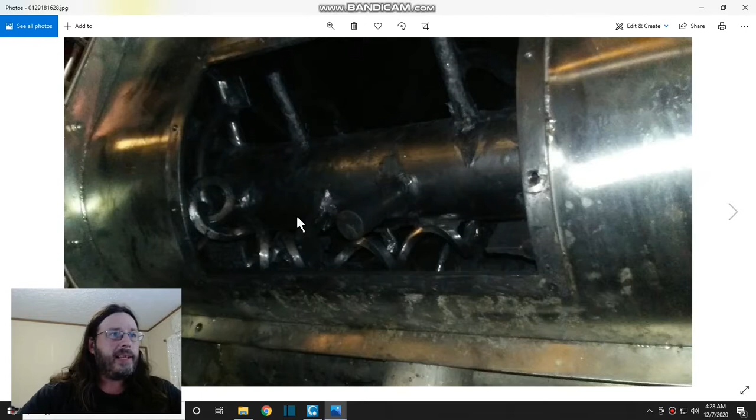This was one of them pigtail screws. I think I've got pictures of the after of this, of what came out. This was on one of them big feeders that I had to build the stands for. This screw would get jammed up and overamp the motor, and of course pop the reset. So they would hit the reset and try to run it again, and it would just keep flexing the screw, flexing the screw.

Inside of this feeder, you had these mixing arms, the counter rotating mixing arms to break stuff up, and eventually it flexed it up enough that it got tied up into this. They were on two separate motors aside from the screw motors, so of course they kept turning, and eventually this thing jammed it up, overamped, and shut the thing down.

At that point they take the side off from it and say, oh hell, we got a mess in here. So they called me up and wanted me to cut all this out, and I was like, okay, I guess. What do you want me to cut it out with? It's all stainless, I can't just take a torch in here to cut this stuff out. I can, but it's just going to melt stuff and make a mess. So I think I ended up cutting most of this out with a freaking grinder.

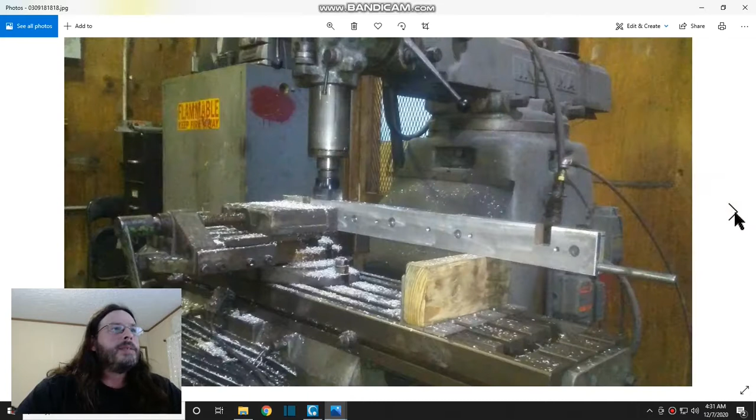What's this? This is some mill work I was doing. I had an old Induma mill, I think that thing was, and it was about slap wore out, man. The bed was all worn on it and everything, but it worked.

It was better than what I had before, which was nothing. I actually got this mill and set it in here, but I think I was doing some face milling on this. This is a heater, another heater bar heater. It's got a tube that runs down it, heating element runs down it, and I think we had them fabricated or got them from another company, and they were too wide.

That's what it was - they were too wide here, and I ended up taking, I think, about a 1/4 inch or something off from them.

This was a pretty handy little thing that I made. Actually, I think I made it for this job. It was just like a little support stand. I didn't have any little cool machinist jacks or anything like that, so a block of 2x4 bolted to a piece of angle iron. If it had to be shimmed up a little bit, I would take actual wooden shims, like you'd use in framing a door, is how I would shim stuff up.

Oh yeah, there's my thing from the beginning. All right,

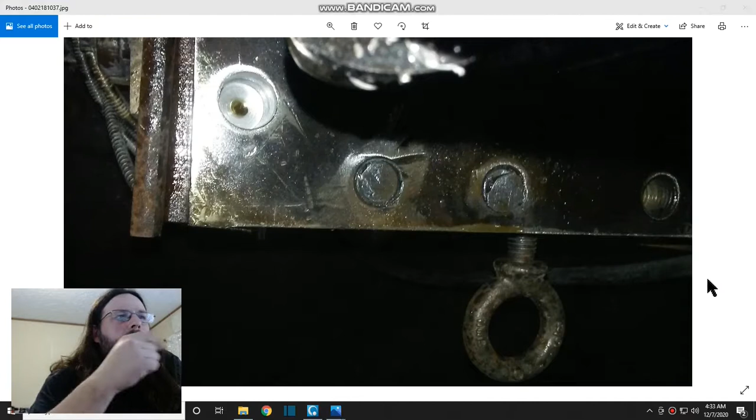This was bolt extraction in a barrel section, I think, for one of our big twin screw lines. They break these bolts off when they put them back together. So they brought me the whole barrel section, a giant solid steel block with two holes in it for the screw to run through.

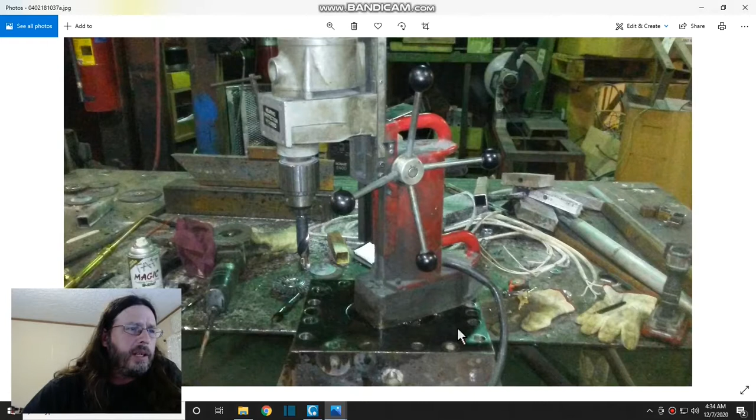There's a whole series of pictures here. It was way too big to put in the mill or anything like that, so I used this Milwaukee mag drill and magged it down. I think I put a couple pieces of angle coming off the table to set it on and clamped it down to that angle, then magged it down and drilled the hole.

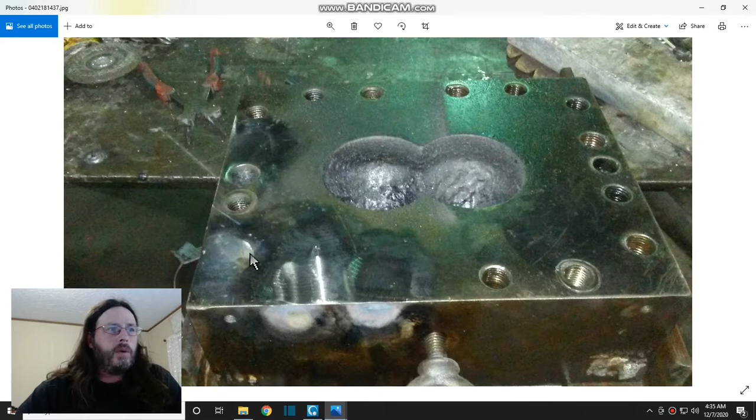I had to weld up the holes because the threads were just gone, and there was no chance of putting inserts or anything in these things. We tried it - you'd put an insert in, it'd last maybe a week, and they'd rip the threads out of the inserts. So I just welded them up, ground them down, and re-drilled and re-tapped the hole.

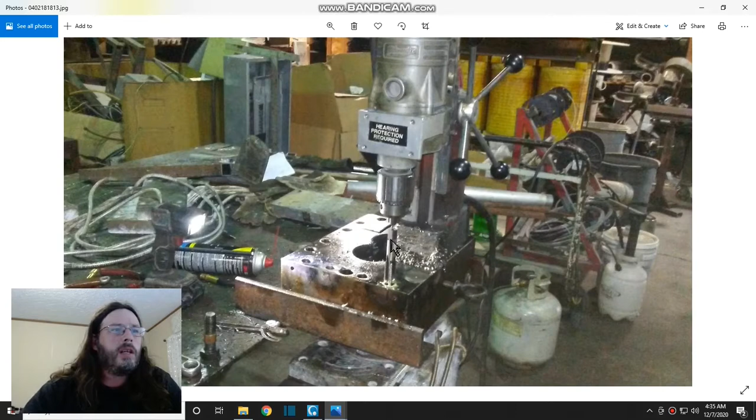That is a self-powered drill press operation there. I had to keep constant pressure on it, so a pipe wrench stuck in a piece of pipe gave just about the right tension and pressure. And there's using a center to line up your tap - that's an old machinist trick.

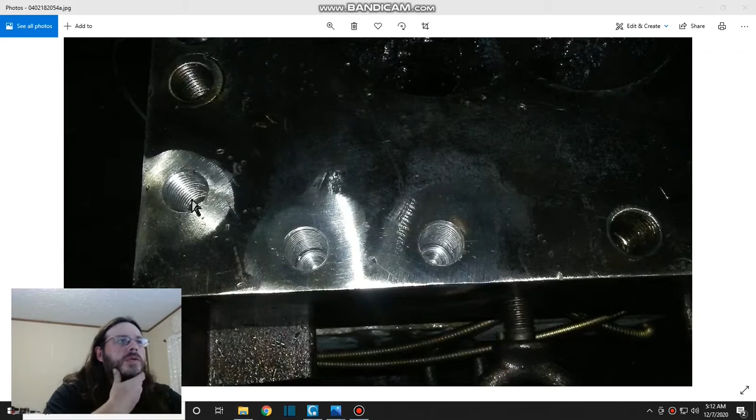And there are the holes all tapped up and finished. I can't remember exactly how many I'd done on this, or the size - I think they were like 20 millimeter, a little bigger than 3/4. I remember that.

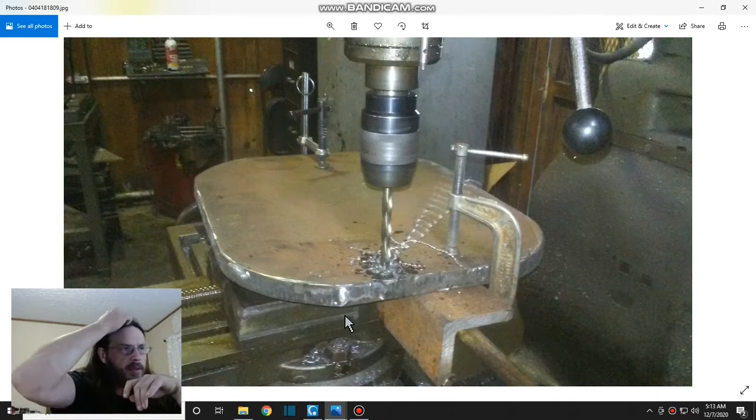Let's see, there's some kind of plate that I was drilling out. I think I didn't want to take the vise off the mill for some reason - I had another job set up or something. So I just clamped in a piece of angle iron and clamped the plate to that, and it worked. It kept me from having to take the vise off. There was no real load, so I wasn't worried about it spinning out.

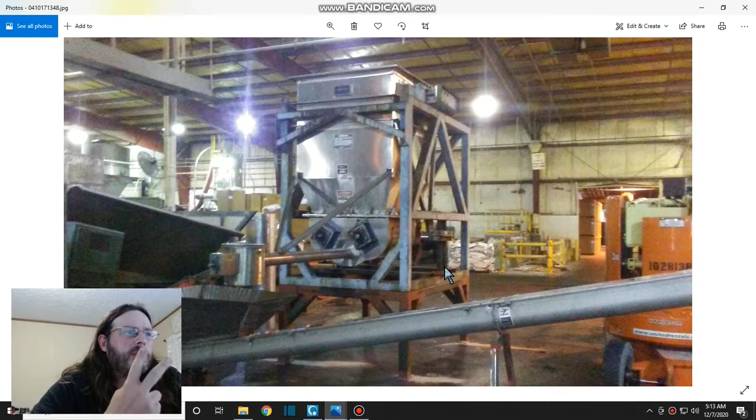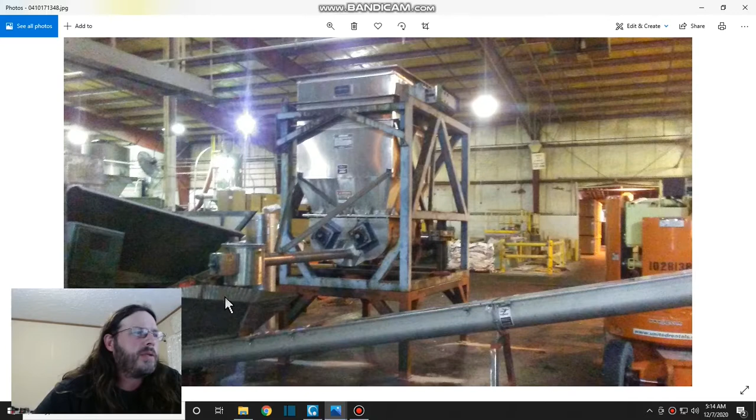This was one of the big feeders that I had to build a stand for. There were two of these big feeders, and this is one - remember the real long screw conveyor. This was the hopper and the long screw conveyor, and this was the hopper that I made that went on top of it, and there was the other one that I had to build.

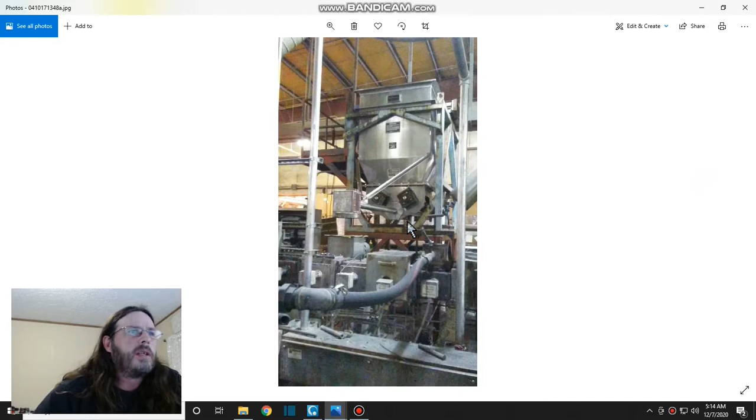I think I had to build the stand for that one too - it was like 4.5 or 5 feet tall, with a catwalk up to the top. They would take a forklift and raise up over top of this with a bag they called a super sack, which had a tied opening on the bottom like a sleeve coming down. They'd untie it and stuff would pour out into it.

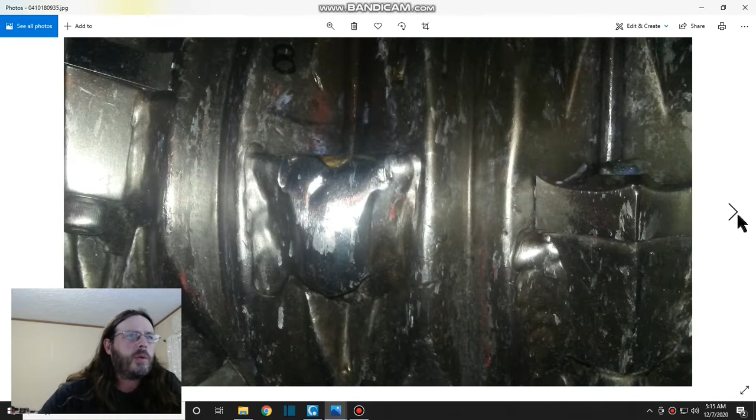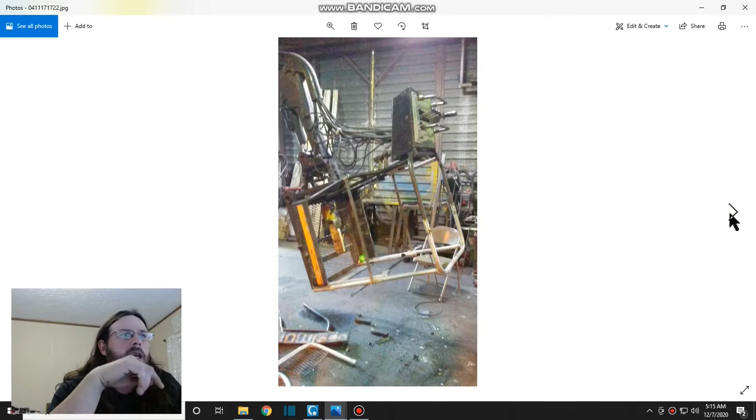Okay, this was the JLG style, the Simon lift, after I got the basket welded up on it. I remember it being fairly easy - I don't think the dead man switch worked on it, so I jammed a piece of wood up into the foot pedal and was able to stand down there with a stick and run the controls, bringing everything down to level to make it easier to weld on. And there's another shot of it welded up and finished.

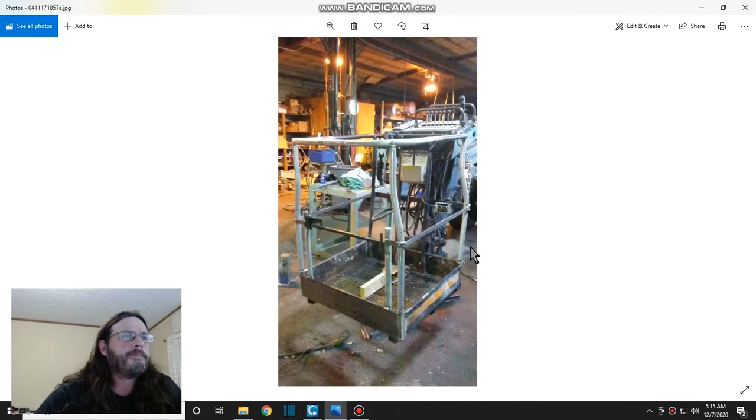Yeah, I had to fabricate a safety gate right here, I remember that. And there it was, all painted up.

I think we didn't have this thing for too long after that. I remember it wasn't too long before something had happened to it - I don't know if they blew the motor up or something, but our mobile equipment mechanic couldn't get it to run again, and they eventually hauled it out on a trailer. I don't know if they sold it at auction or scrapped it, but by the time I left they had gotten another JLG that was newer, battery powered, slightly smaller, and easier to maneuver around in the plant.

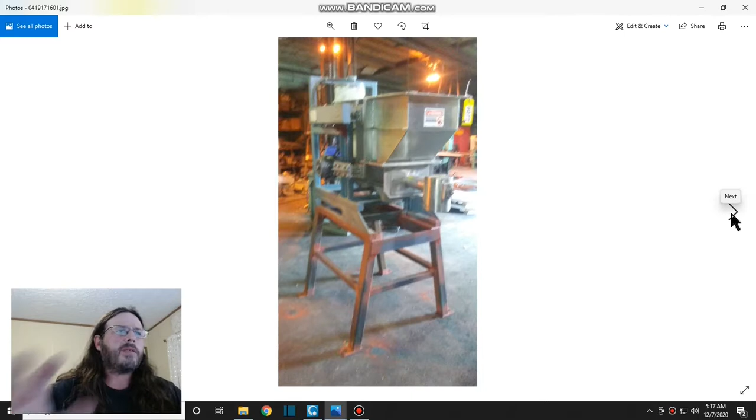I remember I splayed the front legs out on it too. I had to do that to give it a little bit of stability because it was very, very tippy, very top heavy.

That one's sideways. I think these were legs for some kind of stand they wanted, to be able to adjust it in 1 inch increments up for various heights, for a small vibratory pan feeder. I think I built like four of these stands, and this is the only picture I took of the legs.

But yeah, it was square tube with angle. The angle went on the stand itself, and you could slide it down and put bolts through each leg, or pins. I think we actually got them like sleeve pins, lynch pin type, so they didn't have to unbolt.

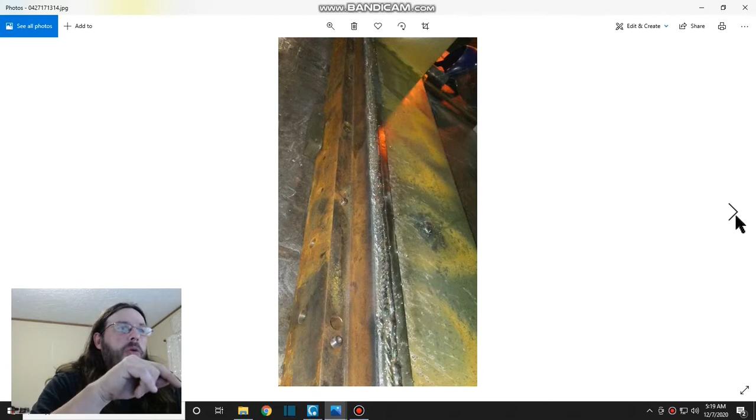Okay, this series of pictures here, the old grinder that we had was just slap wore out. It had so much stuff ran through it, and it was so abraded down and eaten out, that they put it down for some kind of big service one time, and they decided that I could weld it back to a close enough dimension so that it would work better.

That was their thinking. I remember I used two full rolls of wire, 30-pound wire, so almost 60 pounds of welding wire into this thing. There were two halves, a top and a bottom half. I can't remember which one this one was—I think this was the bottom half. But yeah, this was a big old stack of beads here, and there's more pictures to this.

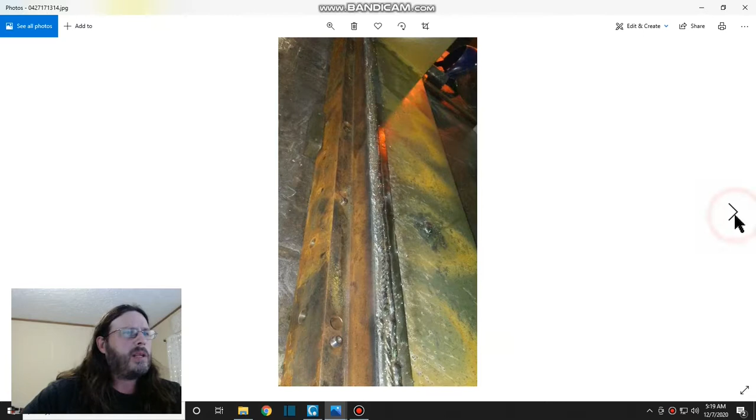And it was big and heavy, not cast. It was machined—solid, solid metal, not a cast metal. But I had to preheat it, and it was a lot of work for not a lot of reward.

But yeah, you can see over here on this side right here—see how that is dished in? That is supposed to be straight down to a sharp corner, and this was just wear right here, and this whole area right here was just concaved in.

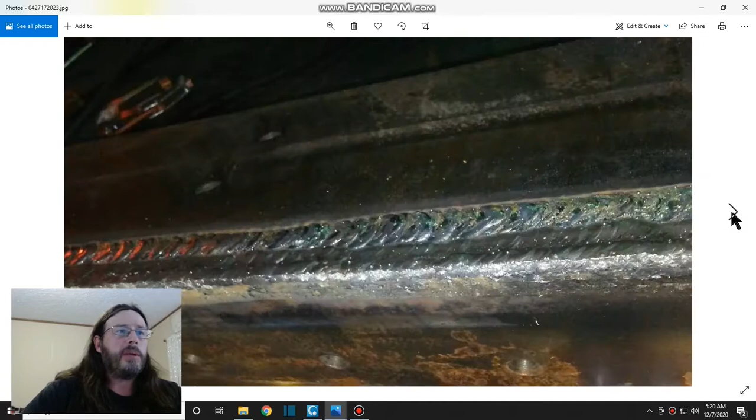It had to be all filled back in with weld, and then ground down, just hand grinding down, since we didn't have any way to machine it down to shape. But yeah, just bead after bead after bead.

There's some aluminum that I'd stacked in here and clamped in to help me get a sharper corner on the beads, because the steel wasn't going to stick to the aluminum—just to give me some place to form against with the welding bead. And yeah, there was a preheat I was doing on it.

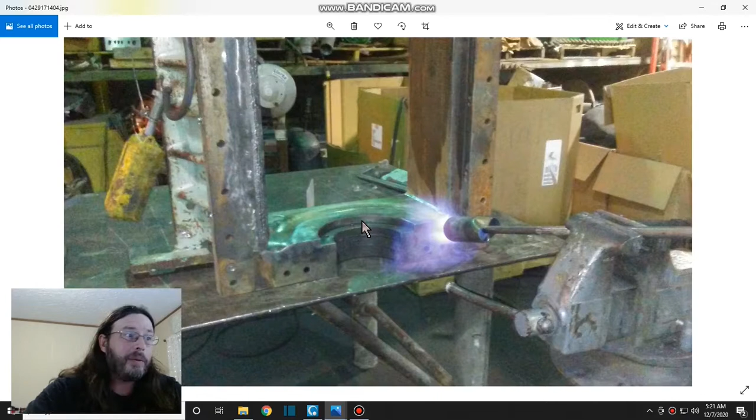I took a weed burner, a big propane torch, and set it up, and of course I got tired of holding this stupid thing, so I dragged a vise on a stand over and clamped it to it, and just let it sit there and burn for a little while, right next to some cardboard—so yeah, totally and completely safe.

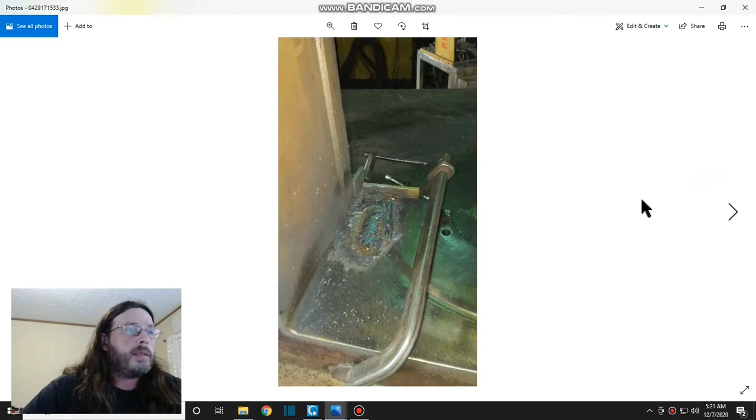And yeah, there's more, just adding in bead after bead.

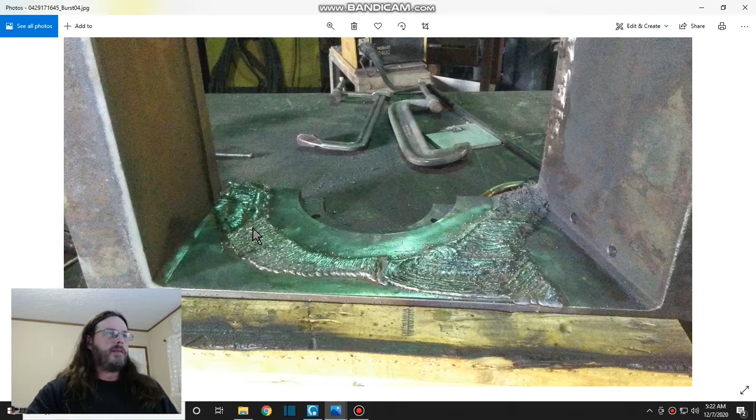Yeah, see that whole area there's dished out. The rotor set in this area right here, and so this here was just all dished out, and so this is all fill weld right here. And then I took a big Wildcat 7-inch grinder and ground it all down, as flat as I could get it, as good as I could get it.

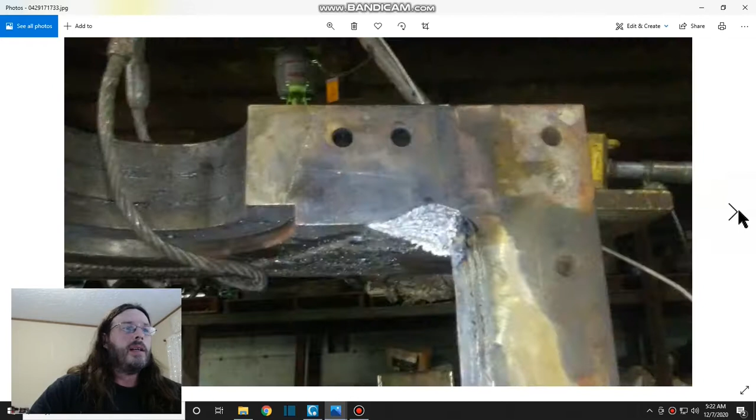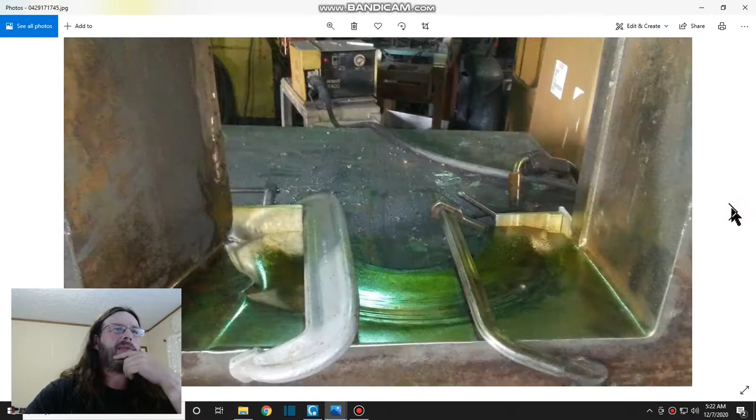Yeah, there you can see, man, that's like probably at least an inch and a quarter maybe of bead from here to here. Yeah, just bead after bead after bead, and weld and grind and weld some more.

This took me probably a good solid 4 to 5 days worth of welding to get this thing done. Yeah, just more welding.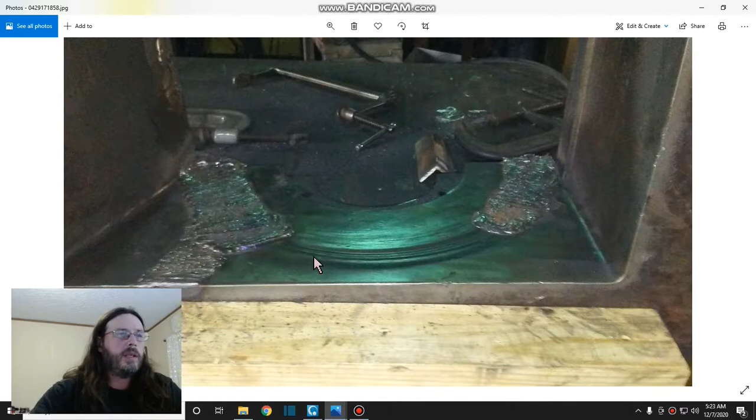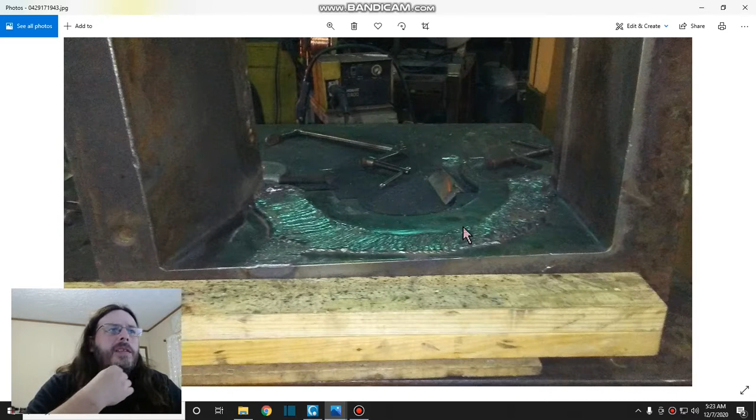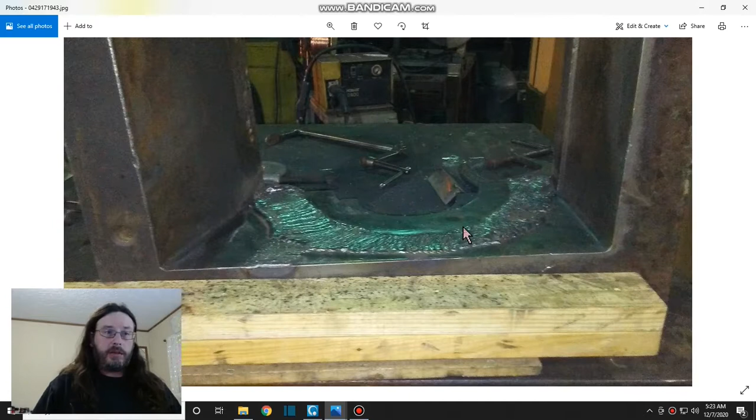This machine, we ended up replacing it probably about a year and a half after I did this. So really, what was the point of me doing all this work if you're just going to replace the machine anyway? I guess it did help for a year—it may have saved so many millions of pounds of material, or something like that.

But I don't know, that's why I don't get paid the big money. And yeah, there's just grinding it down.

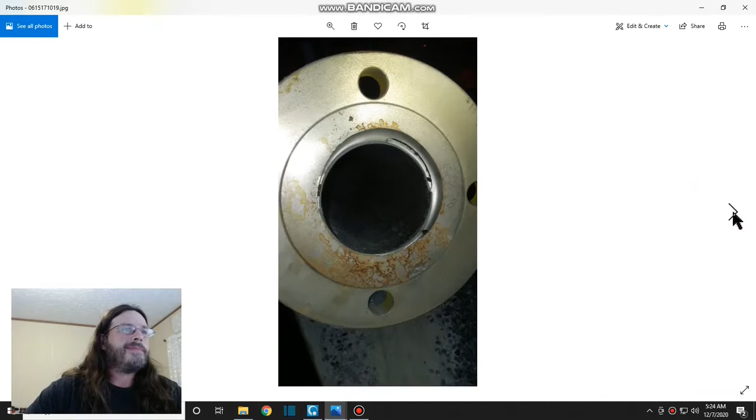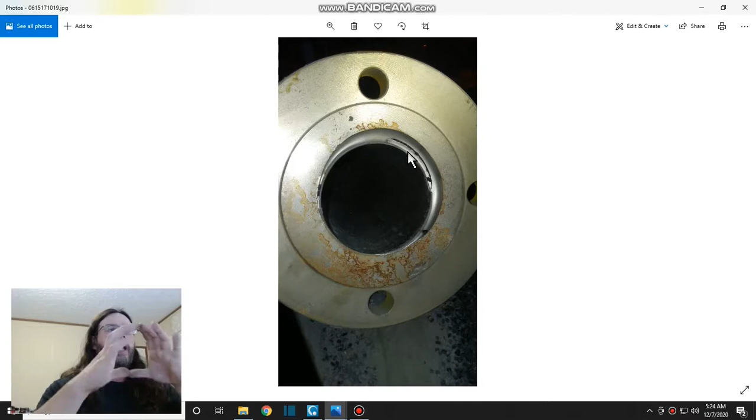This was more wear. I mean, that stuff just ate up, just abrasion. Yeah, this is a flange on a piece of like 3 inch diameter pipe, and you can see just all this wear right here.

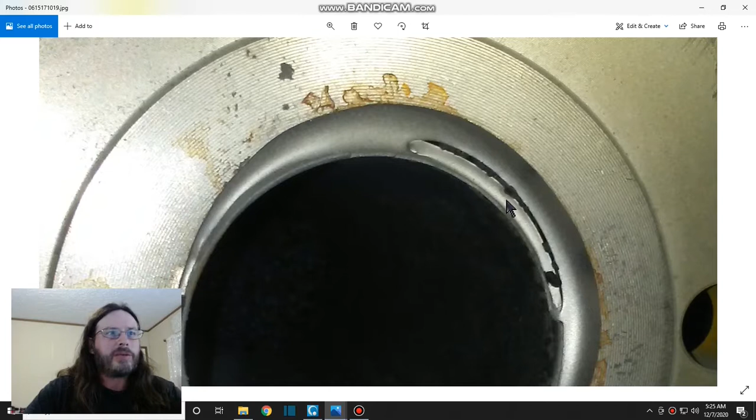You can see these little black dots here. That's pellets, plastic pellets embedded down in there. How do you weld on that? You can't just weld over top of that. It pulls contaminant into your weld, makes porosity, makes for a shit weld, so you'd have to just replace it, cut it all out and replace the piece of pipe.

And they couldn't have any contamination. Some types of plastic don't play with other types of plastic, so you had to get rid of it.

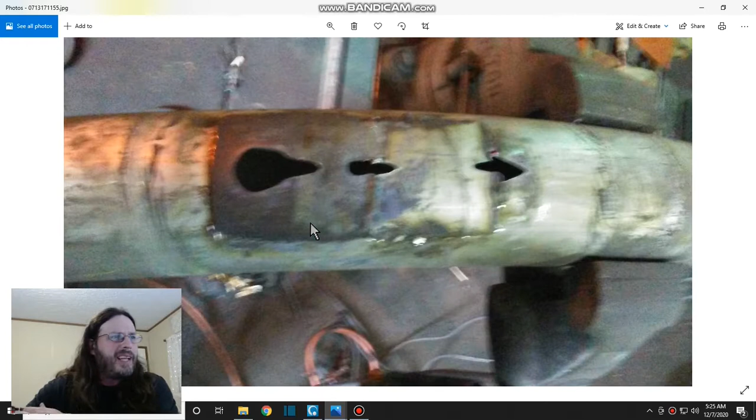This one here, it's kind of a blurry picture, but this is one I had patched before, and then it blew back out again. So they brought it back to me expecting another patch on top of my previous patch. What do you do? Just ate out.

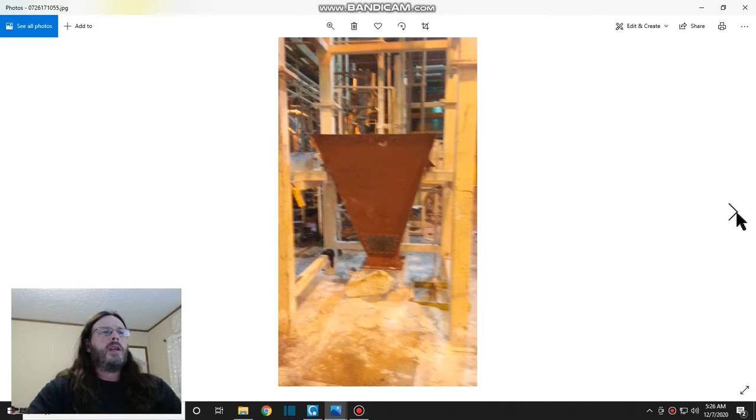Okay, this was a hopper I built for one of our big twin screw lines. It took some kind of mineral additive, kind of like talcum powder, and what they had before wasn't very good—all beat up, cracked up. We got tired of repairing it, so I designed it and drew it out. I don't think I got pictures of the actual fabrication, but I built the entire thing from raw steel. This was one of the few jobs where I got brand new steel and built everything from scratch.

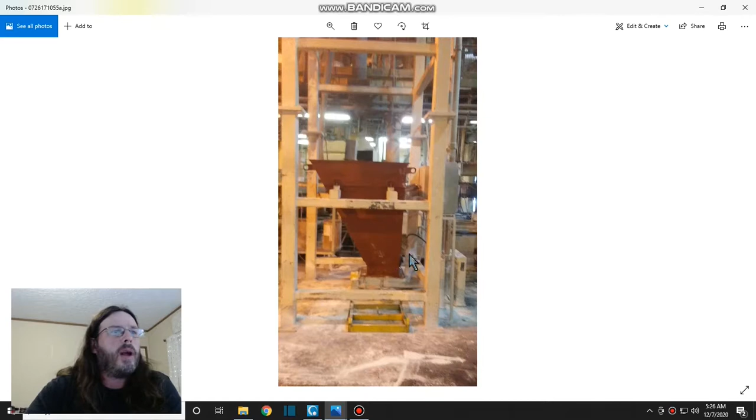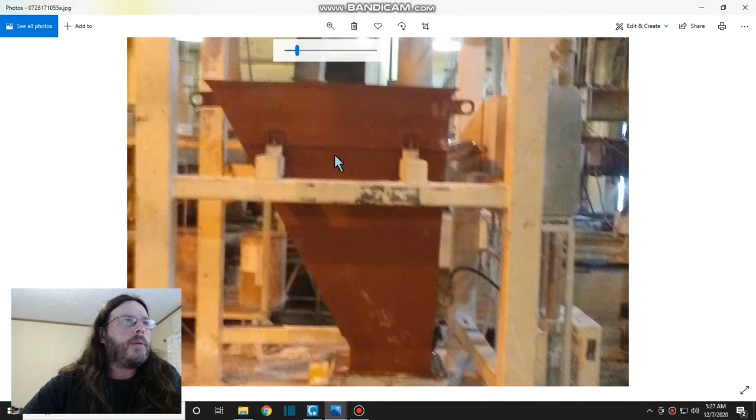It's got a vibrating mechanism on the back, and I remember I double plated it up, put a much heavier plate there. This was built out of 3/16 and quarter plate, and I put a much heavier one and rounded it so it wouldn't get little stress cracks in it. They were real happy with it, real pleased with that one.

My only regret when I built them was that I didn't build four—I only built three, and I wish I'd built four. Even if I just made two that nested together, and two more that also nested together, storing two sets—I wish I would have done that.

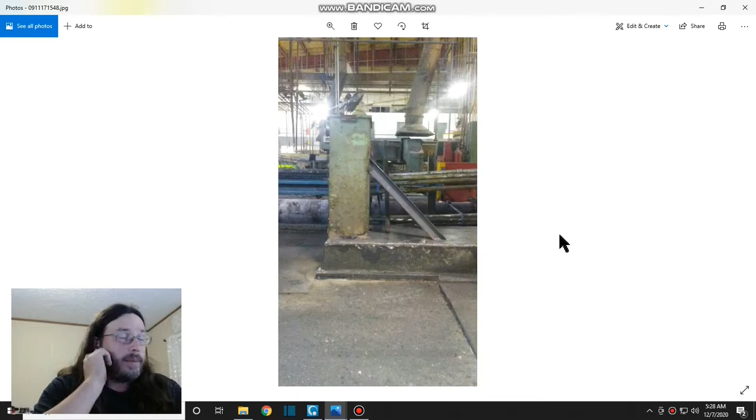I wish I had, and I probably do somewhere, a before picture of this. This thing here, this podium or stand, there's a barrel that goes on top of it with a screw that runs in it—a big screw, like an 8-inch solid shaft screw, the actual extruder screw that pushes the plastic out of a die.

It had jammed up, and they pushed the barrel. They sheared off the bolts—inch and a quarter bolts—sheared them off and pushed the barrel forward, pushing this thing forward about 8 inches. It bowed this plate. This here is 1/2 inch plate, and this here is 3/4 plate, I believe. It bowed the whole plate up about 6 inches.

So I had to cut this off, cut that plate off, put a new piece of plate down, remount it, re-square it, reline it. I added this—they wanted me to add some kind of support gusset. I said the only thing I can do is put some channel on the back, unless you want me to box in the whole thing. But it still ain't gonna stop it. You do it again, something's gonna break—there's going to be a weak point.

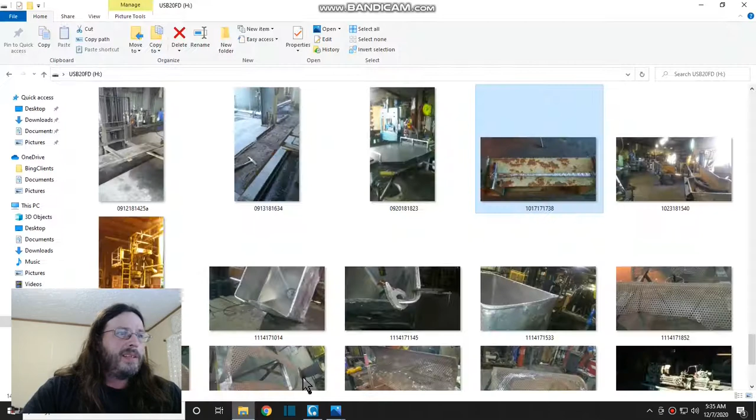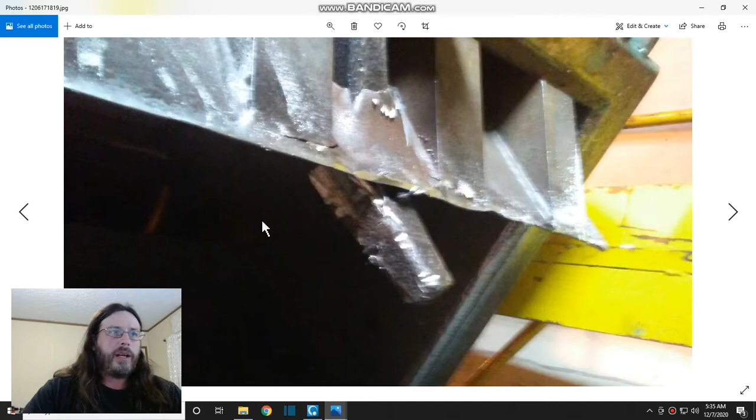Then this happened — I've got pictures on here somewhere. Let me scroll through. Okay, so then this happened. They call me to come over to the grinding area, and this is actually the head of that hammer.

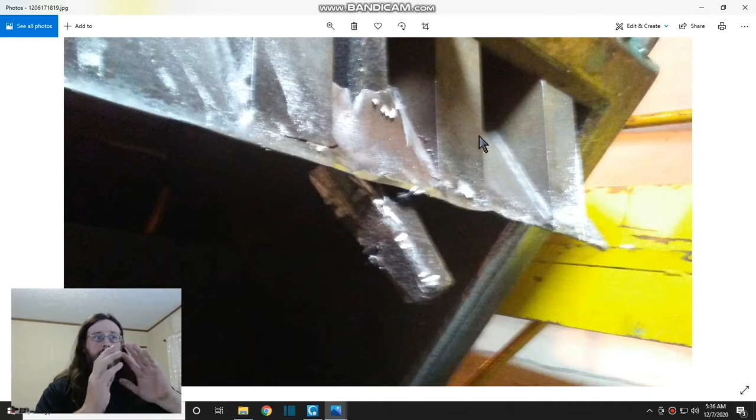They dropped it into the grinder by accident, of course. This is a piece of half-inch plate metal. Luckily this is the bottom or top of the grinder, and nobody was hurt — no injury — but it threw this probably 5-pound chunk of metal through a piece of half-inch plate steel, and of course just annihilated the hammer.

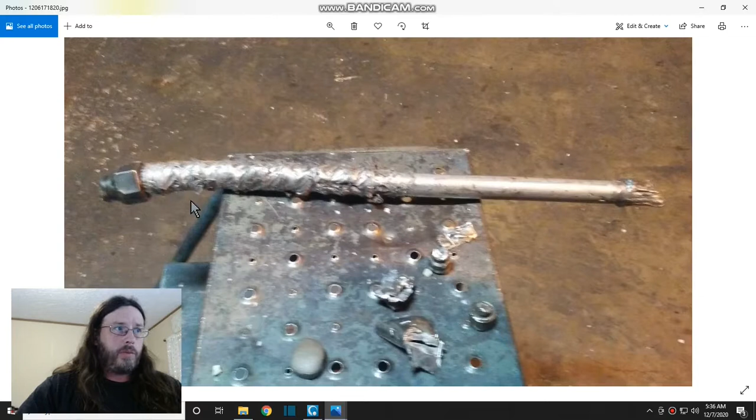There is what was recovered of the hammer. Remember, this thing is a giant wood chipper, and I mean it just totally destroyed the hammer, destroyed blades on the machine, and also put a big hole in it.

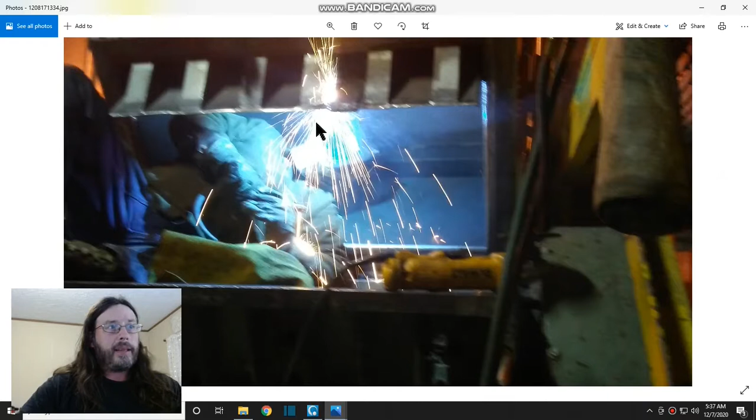So yours truly — okay, there's one of the blades that we pulled out of it, and there's yours truly up inside of this thing, welding in a patch piece so they could still use this. As far as I know, of course I was a nobody, but as far as I know no disciplinary action, nobody got suspended or time off. Nothing really happened other than, oh well, we broke it, but we got it fixed now, so drive on.

I mean, how do you do that? If that was my machine, my personal machine or my company, I'd have somebody's head over that. Even though, yes, it was an accident, that is still unacceptable to do that much damage to a piece of equipment.

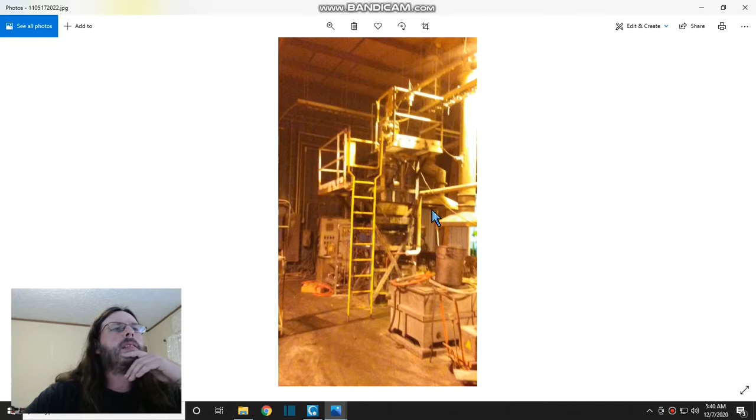I think that was another feeder over top of one of the smaller lines, and I built this catwalk above it, and this catwalk above it. They actually both served almost the same purpose - this one allowed them to access this area of the feeder and remove a section for cleaning, and then you went up another short flight of steps to access another area of the feeder to clean. A normal person would just take a JLG or a forklift with a man basket, but they didn't want to do that. They wanted catwalks.

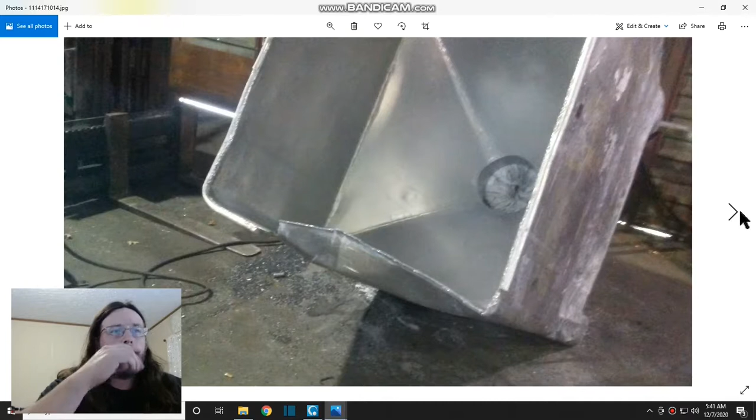These were aluminum totes that they would use to put material in, and there's a sock on the bottom that they could tie up, and they just beat the hell out of these things. I would do like 6 or 7 of these every 6 or 7 months, that they had beat up enough that they'd finally bring them down to me to work on. They were aluminum, so it wasn't hard work, but it was just tedious and time consuming to try to straighten them and repair them.

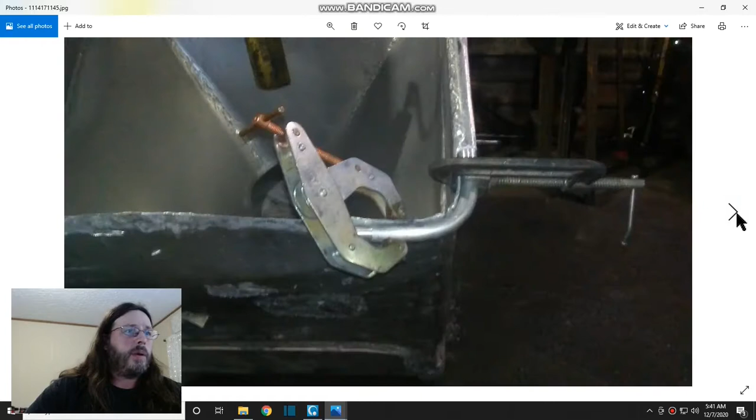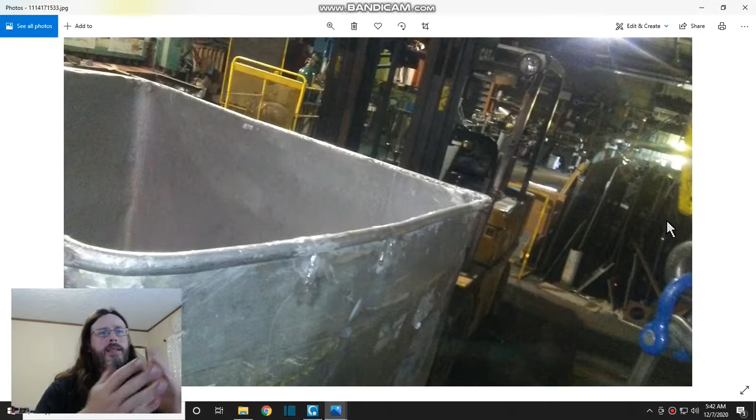This here was an aluminum conduit, bent with a conduit bender to make this radius, and spool gunned it all in. Again, couldn't have any cracks or voids or areas of contamination where material could get stuck. A lot of that plastic wouldn't play well with the other type of plastic.

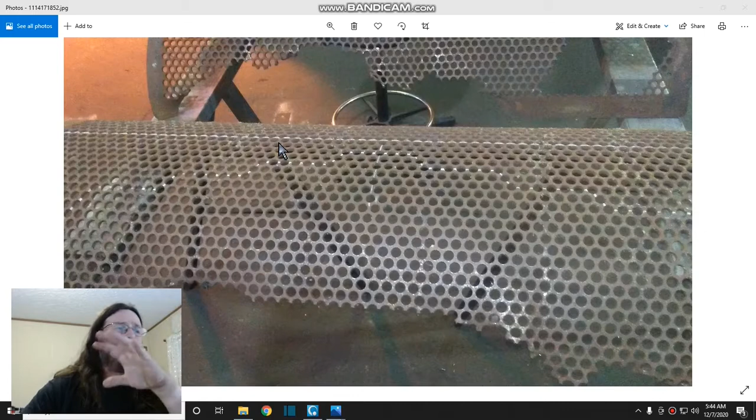Okay, these here were screens for the grinder that controlled the diameter of the regrind. For a while we couldn't get these - we didn't have a supplier, we didn't have a vendor for them. So I would take these old damaged ones and cut pieces out of them to repair and patch other ones, or areas that had been damaged on other ones.

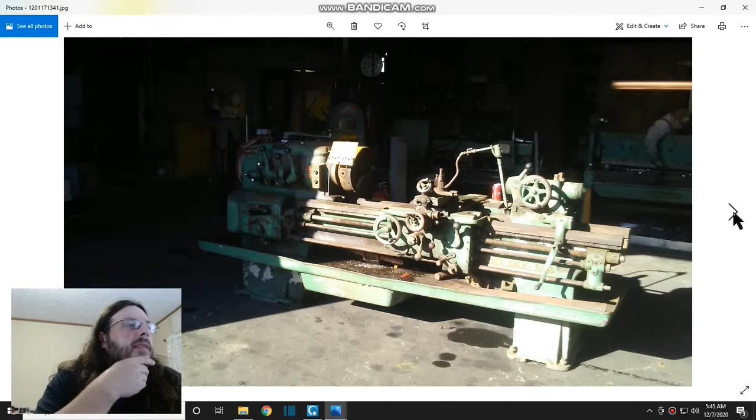This was the day I got my lathe. When I first started this place, we didn't have anything really as far as metal fabrication and metal working. They had welders and stuff here and there, but they didn't really have a place to do it - it was just do it wherever. So they gave me control of this building, and I already had a bandsaw and a shear in there. An overhead crane was in there, and some steel racks. So obviously at some point somebody was planning on working out of this as a fabrication shop, but for some reason it got dropped, or they didn't carry on, and then new management took over.

I got hired, they gave me control of this building, and I eventually got a mill, I got a lathe, I got better welders, I got a bandsaw, a couple other pieces of equipment. This was the lathe - this was an old Axelson lathe. I think 16-inch swing, I don't remember the bed size, 54-inch maybe. But man, I love this thing.

I love this lathe. They still use it to this day. It still runs. It was in great shape for its age - it's a 40s model, and I put a quick change tool post on it, and that's pretty much all I did to it. It didn't need anything else. All the gears run in it, it had very little noise, very little run out. It was just a great piece of machine. I was so happy to get that, so happy to get that machine.

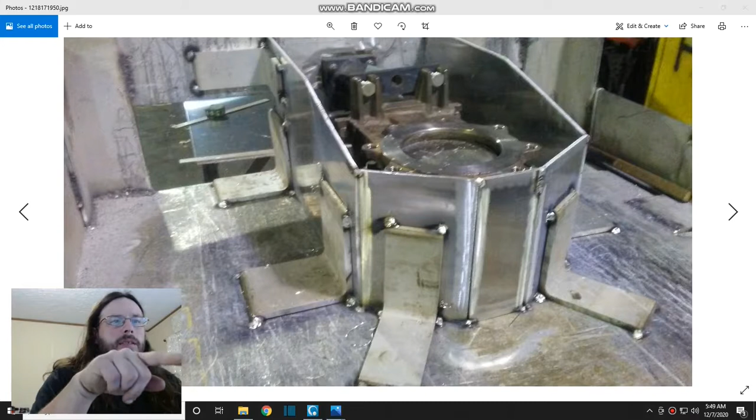I've got 4 more pictures to talk about. This is the bottom of one of those aluminum totes. They wanted to put an air actuated valve on it so they could pick it up with a forklift, jack air to it, and flip a lever to open a valve and dump it rather than having a sock on it. That's a viable idea, a good idea really.

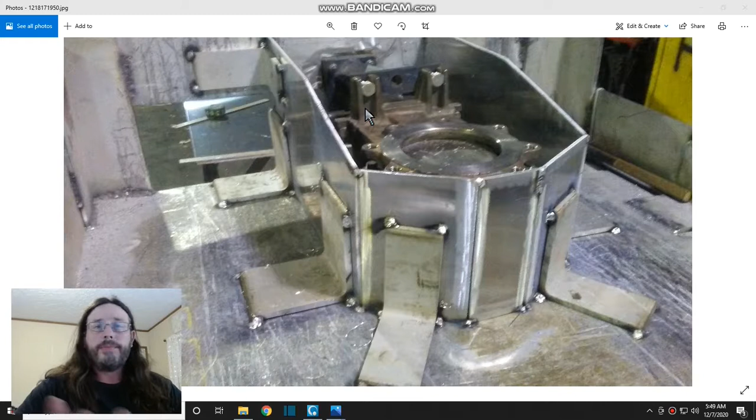So I made the flange and put the valve on. They promptly broke it off - I mean promptly, it was not even 2 days before they brought this thing back down to me with the valve laying inside the tote, because a guy had hit it with a forklift hard enough to break the flange off.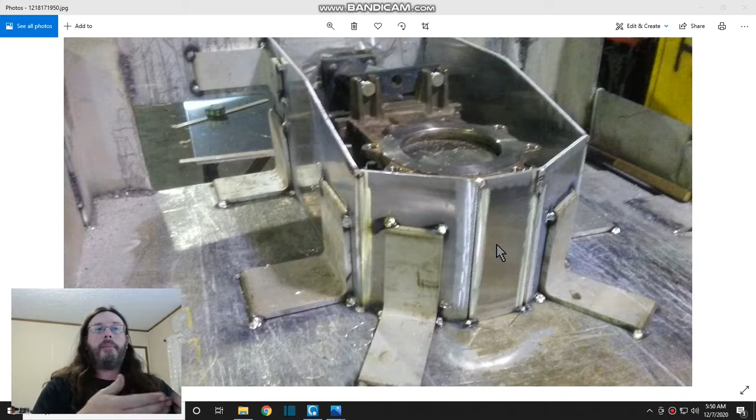So obviously we had to do some idiot proofing. I put the valve back on the flange, welded the flange back to the tote, and built this armor box around it. I say armor, but it's still all aluminum - it just gave them something to hit before they hit the important parts. It was 1/4 inch aluminum, spool gunned in, probably a 4043 wire on the spool gun.

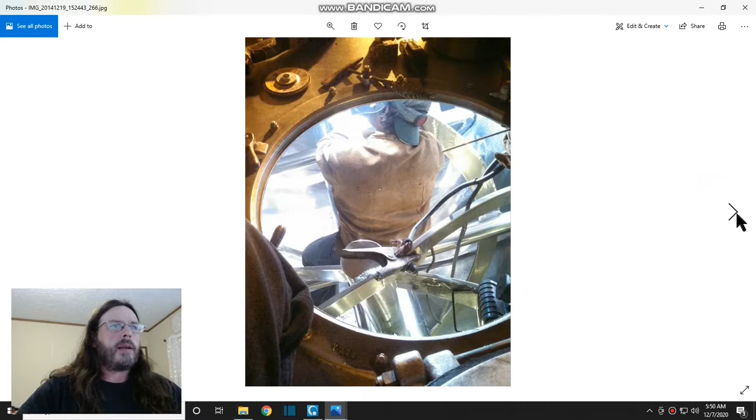That was a little slice of nightmare hell there. That was a blender we had that would break quite often. These arms, these ribbons, would break, and somebody would have to go inside and weld it back together - usually that somebody was me. So that's me down inside, with one of my helpers taking a picture of me, laughing at me.

You always had to have a hole watch for this though, and we had forced air ventilation to suck fumes up out of it. But it was a nightmare to go down inside this thing because it was slick - all stainless steel, you couldn't get a grip to stand up on it. Usually I'd just sit down and straddle the shaft that the ribbons were on to weld it back together.

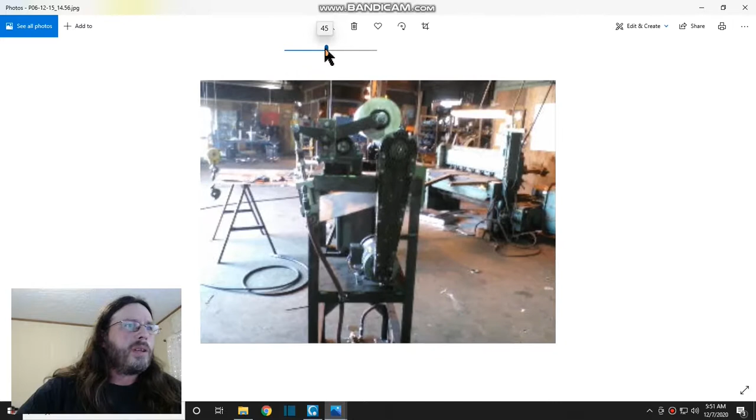I think this is the last picture here - an old one, I don't even remember what I took it with. This was a line puller that I'd built, I think just after I first started there. This might have been one of the very first things I actually fabricated in this shop, built from scratch. I built everything on this except, of course, the motor and this drum.

Everything else was fabricated. This thing was on an air operated foot switch - you'd step on it and it would raise this up, and you'd pull the strands into it to help pull them on down the line. I ended up making at least 2 of them that I can remember. We had 3 or 4 of them too, and I just kind of copied the design.